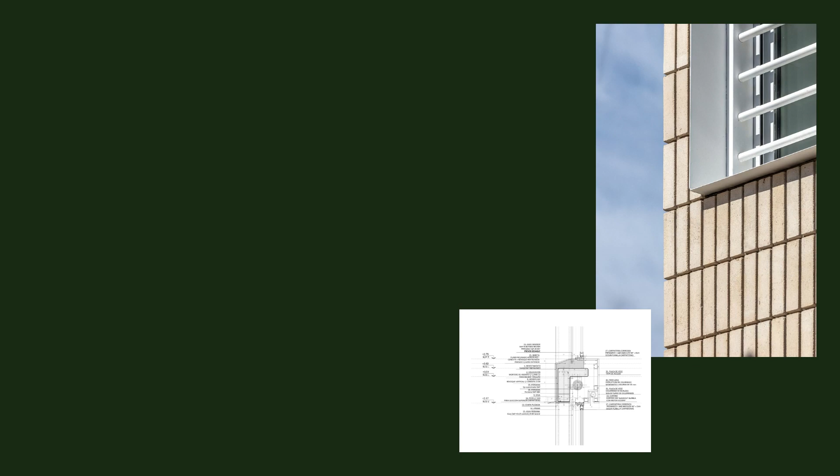Vivienda DISA by Tomas Mielnikowicz in Lanús, Argentina. The residence is located in Valentín Alsina in the Lanús District, province of Buenos Aires. The plot, a lot between party walls measuring 8.66 by 29 meters in depth, is oriented towards the northwest, with its front facing the public road.

The clients are a family composed of a father, a mother, and 2 children. The house was intended to have a master bedroom, a bedroom for each child, a kitchen dining area, a spacious living area, and a covered garage for 2 vehicles. The clients wanted to maximize the uncovered space of the existing lot to use it daily as an outdoor space. To achieve this, the decision was made to shift the constructed volume towards the front, thus leaving a generous space at the rear of the lot.

To emphasize this requirement, the creation of a compact residential volume was considered, while maintaining the spatial quality of each area and providing the appropriate privacy and scale to the backyard. Thus, the residence would establish a permeable and open link to the rear, creating a contrast with a more private character towards the municipal line.

Strategically, the distribution placed the bedrooms on the first floor, while public spaces were located on the ground floor. This approach allowed the backyard to relate simply to the interior of the house, conceiving it as a large space contiguous to the home, experiencing it daily as a natural extension of the domestic environment.

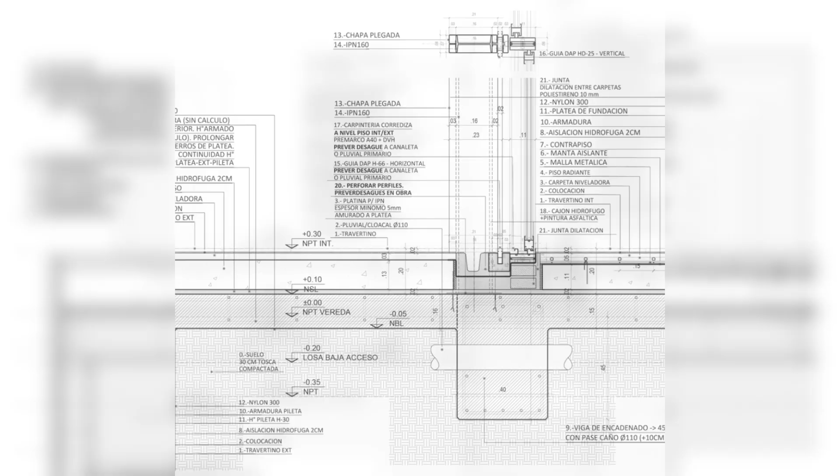To harmoniously merge the backyard with the interior of the house, the task of creating an exceptionally translucent interior-exterior boundary was undertaken. This boundary was designed to have essential features ensuring optimal climate control, adequate lighting, the possibility of darkening when necessary, as well as security and accessibility within the home. As a result of this approach, a facade was designed that can adapt completely or partially, depending on the needs and preferences of the inhabitants, allowing a seamless transition between a closed space and one that is completely open.

The enclosure at the rear of the residence was conceived to adapt to the changing needs of the user, offering the flexibility to become a solid boundary or disappear completely. To achieve this versatility, a facade was designed integrated with automated blinds and large sliding glass windows at ground level, allowing total opening during the day to naturally illuminate and ventilate the interior spaces, and the possibility of darkening them completely at night.

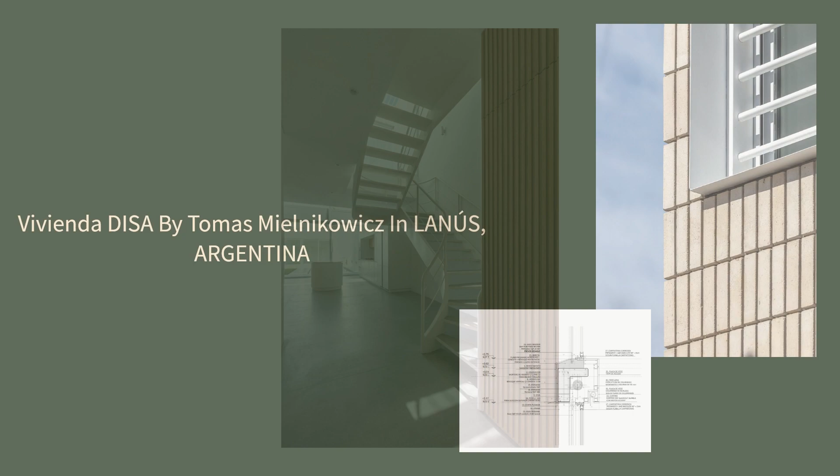The implementation of self-locking blinds helped minimize the thickness of this interior-exterior boundary, eliminating the need for bars or other security devices. In this way, the structural, darkening, and security elements of the house were consolidated into a single system. Additionally, automated roller blinds were incorporated as an additional layer to control the entry of sunlight and ensure privacy, allowing the filtering of natural light throughout the seasons without relying solely on artificial lighting.

The structural design of the house was based on a diagram that modulates and dimensions each space in the home. This modulation is visible and perceived in all areas of the residence, also defining the dimensions of the front and rear window and shutter panels. The spatial layout of the residence is based on dividing the total width of the lot into equal quarters, creating a module of 1 quarter. Then, a submodulation is introduced, dividing each quarter in half, generating a module of 1/8. These patterns govern, articulate, and give dimension to all interior spaces, also defining the compositional elements of both facades.

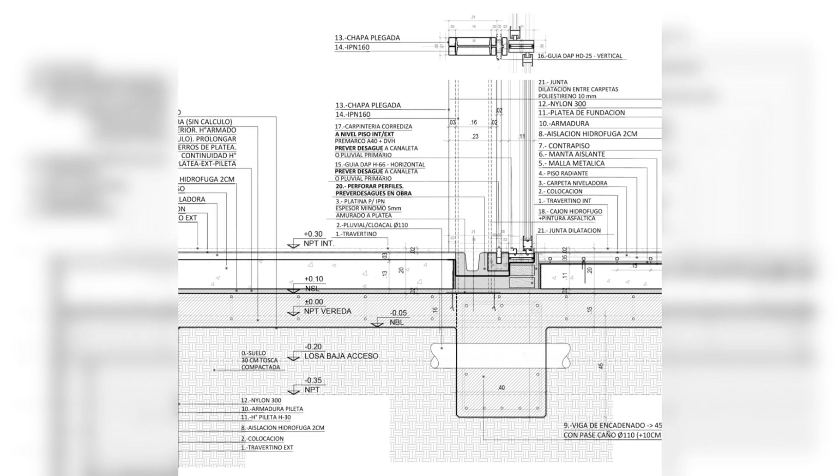The dimensions of the main spaces are defined by the 4 module, spanning the total width of the project. For example, the living kitchen dining space spans 4/4, while the adjacent living area occupies 2/4. The bedrooms are distributed in 2/4 at the front and back, and the stair space develops in 1 quarter. To adjust the dimensions of bathrooms, parking, circulations, and laundry, the submodulation of 8 parts is used.

The front facade is defined by the partition of 8/8, providing greater versatility for the required functions of the program, granting more privacy towards the public road, while towards the backyard, greater openness and transparency are sought using the 4/4 module, minimizing structural dimensions using metal columns. The meticulous proportion between elements, the harmonious relationship of spaces with each other, and the connection of the module with the height of the residence converge to create a pleasant and cohesive sensation when traversing and inhabiting each corner.

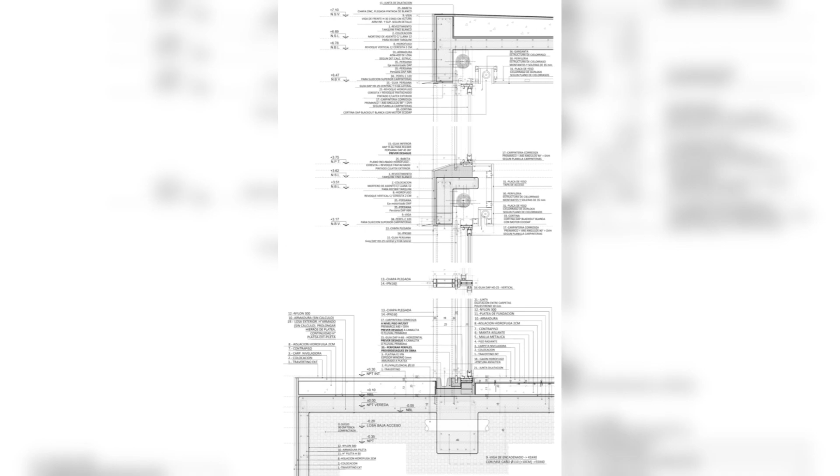To highlight this harmony, the interior design of the house was conceived using exclusively neutral materials and wood. The entire residence presents itself with geometrically simple spaces in white tones, devoid of moldings or ornaments, thus cultivating a minimalist and simple character. To infuse warmth and contrast to the predominant white, all furniture was made of American oak, consolidating visual and sensory harmony in each environment. This residence not only seeks functionality and efficiency but aspires to become a harmonious home that reflects the identity and specific needs of the family, providing a welcoming and adaptable space to their lifestyle.